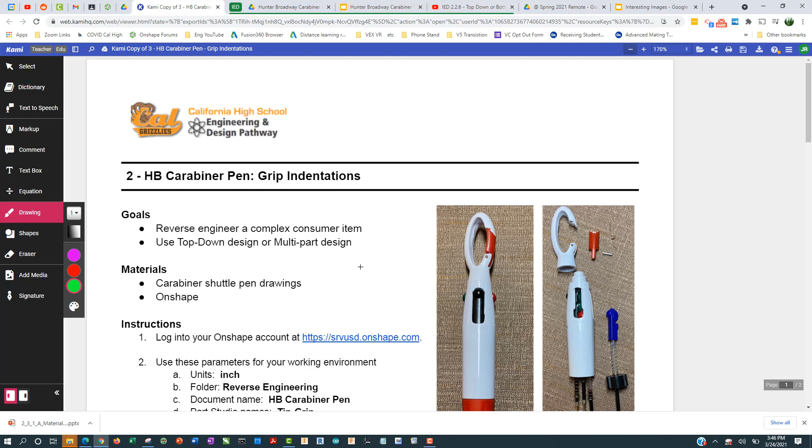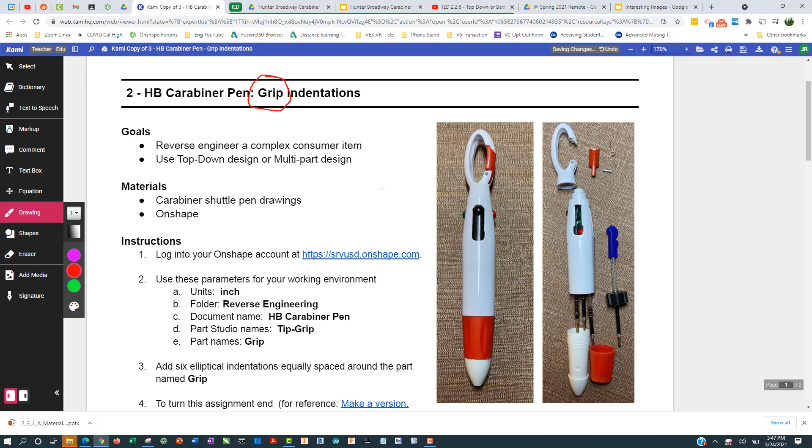In this video, we want to modify the grip that we've made previously, the orange grip, to include these indentations. If you look closely at the pen itself, you can see that right here there are these little elliptical indentations, and if you look at it more closely, you'll see there are a total of 6 of these all the way around. So we want to make these things, and you can see what they're shaped like.

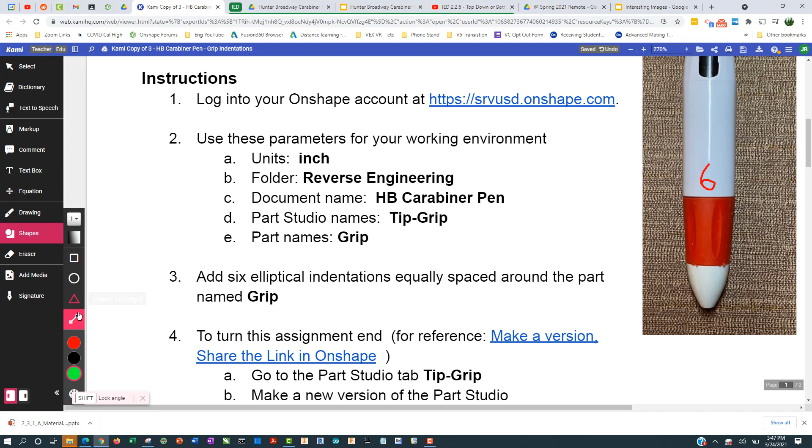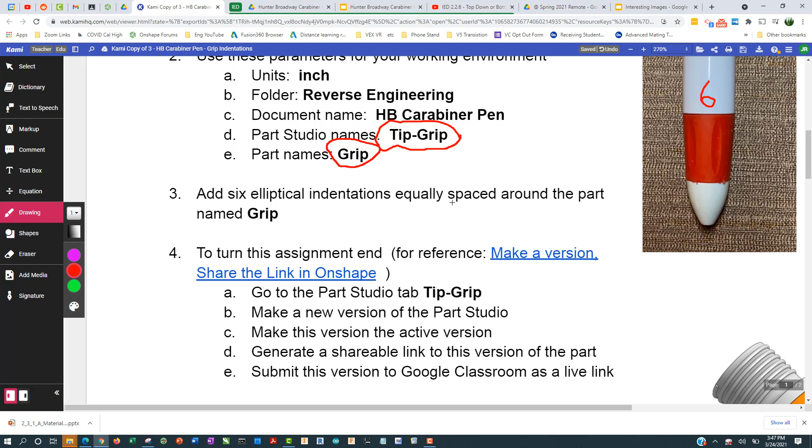So we want to continue to work on the tip grip part studio, and we're going to be working on the grip part. And it says to add 6 elliptical indentations equally spaced around the part named grip. So when you're finished, it'll look something like this down here.

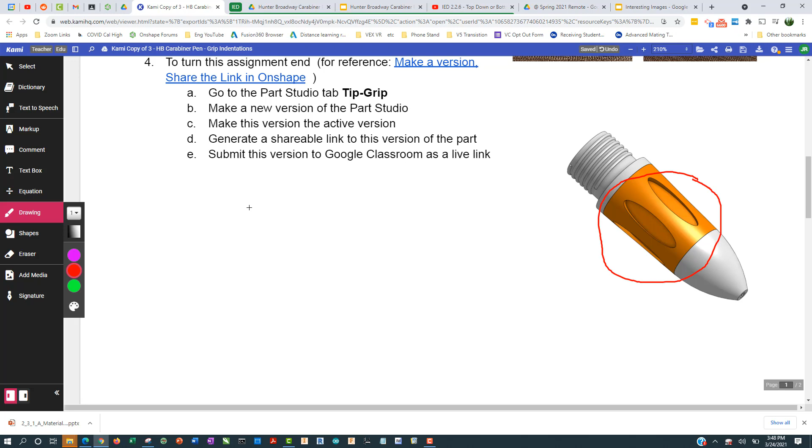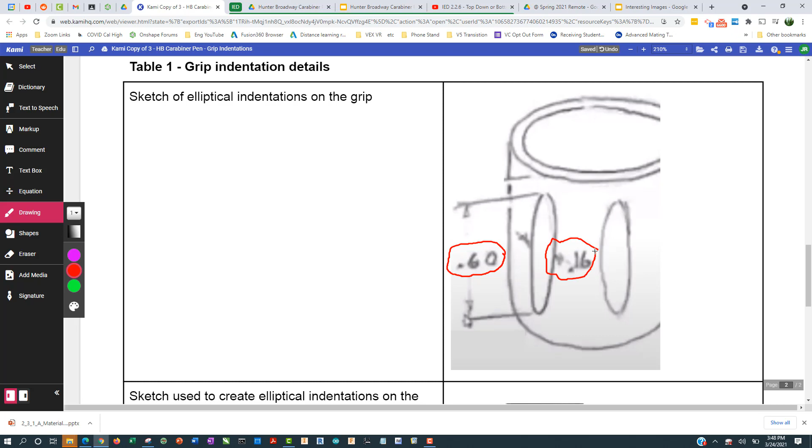Alright, so let's start first at this point, and let's see if there's any instructions here. So here is a sketch that might be drawn when we're doing the reverse engineering, and here we've got 0.6 for the major axis of the ellipse and then 0.16. And it doesn't say anything about where it's placed relative to the grip, but I guess we can use this one here. So use this sketch to create the elliptical indentations. Note that the sketch plane is 1 inch from the origin.

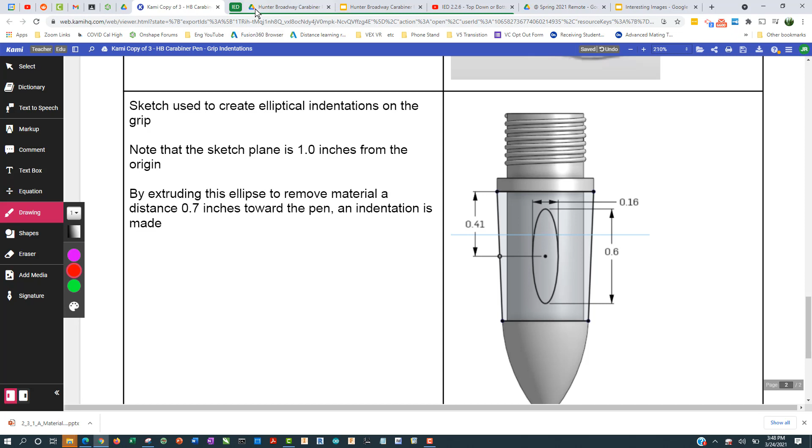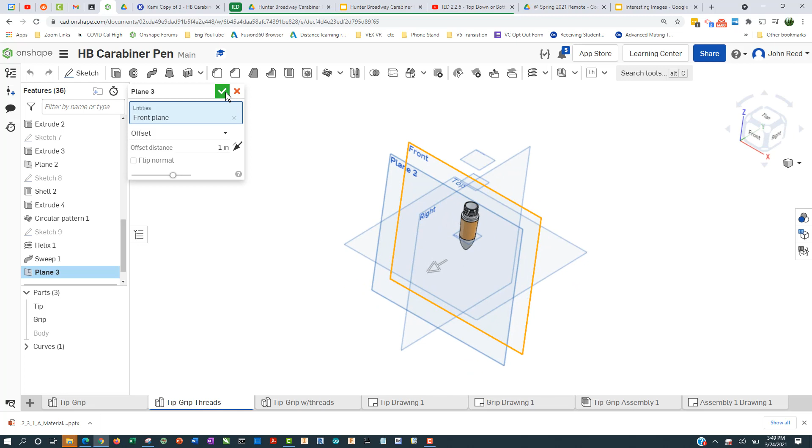So let me show you the strategy here. So we're going to come here, and again I'm going to turn on all the planes and press Shift 7 to get isometric, and I'm going to right click on the front plane and do an offset plane, and it comes out 1 inch, as you can see there. Plane 2, and I'm going to accept that, or is that plane 3? Anyway, I'm going to accept it. Alright.

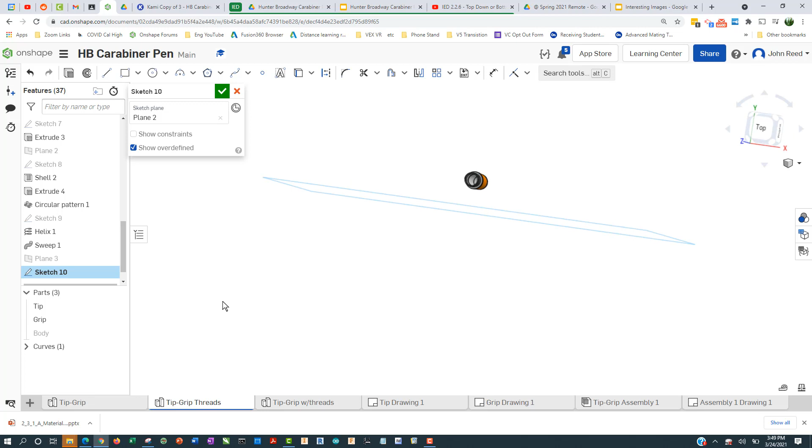I may have a plane 2 already there, so I'm going to place a sketch on that plane. Press N to get the sketch plane normal to me, press P to get rid of all the planes, and you can see now I've got a sketch plane out in space 1 inch from the origin, so 1 inch from the center of that thing. Okay, so what's going on here? Why am I doing this?

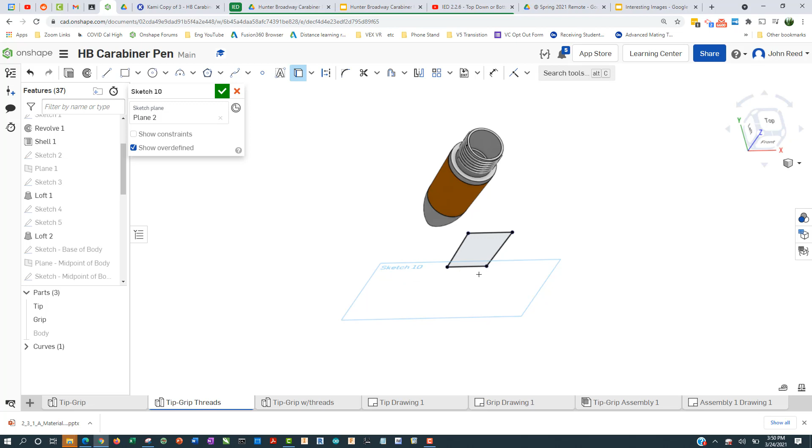Well, to make this ellipse, what I'm going to do is use these lines here. I'm going to project these lines from the part onto my sketch plane, and again, if I look out, you can see my sketch plane goes in all directions infinitely far, even though it shows a finite rectangle there. But my sketch plane is out here, and I've just projected those edges of the grip onto that sketch plane. So I'll press N again to get normal. Alright,

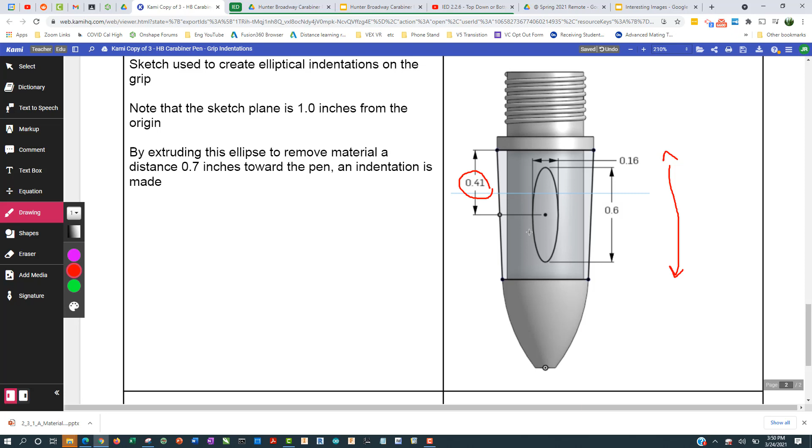so I'm going to come up here to the ellipse, and I'm going to move along here until I get halfway. Do I do that? Let's come back to the instructions. It looks like that is the center. I recognize the 0.41. I think this distance here is 0.82. So I am going to put it halfway up. Let's see if that works.

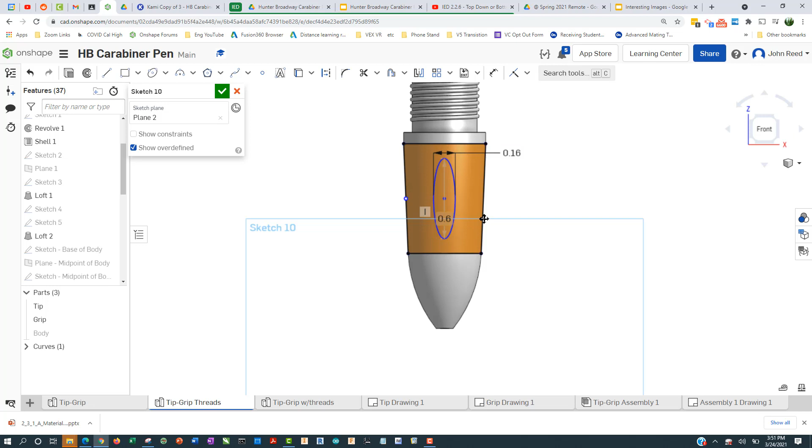So I've chosen the ellipse tool. I'm going to come up here to halfway, then I'm going to move over, click there, and then click there. Okay, and so this is 0.6. That's the length of the major axis, and then the minor axis is 0.16. Okay, so let's kind of move these dimensions out of the way so we can see better.

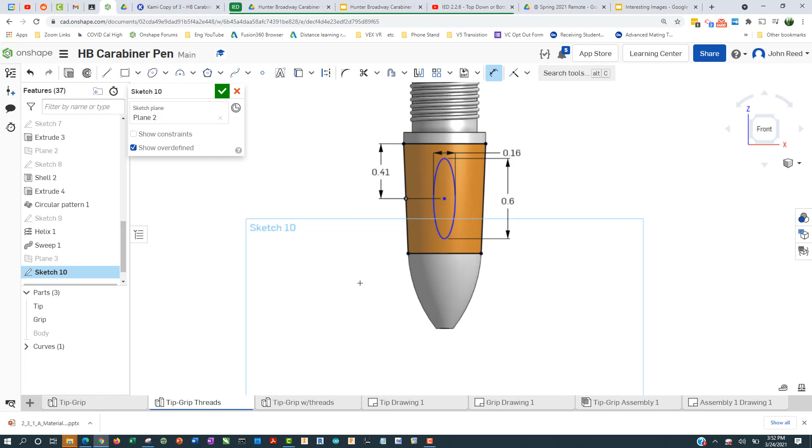Okay, and the reason that it is still blue is because we don't know where it's located, so I think we're told to make it 0.41 from the top, and I think that is halfway, so that dimension is kind of a driven dimension. It's just documenting it. It's already equal to that. Okay, still blue. I wonder why. I think I haven't placed it horizontally, but I don't need to. So I'm going to stop there. And I'm happy with that.

Well, maybe I could just to document it. So from here to here, I'm not really going to use this dimension, but it will make my sketch fully constrained and all black.

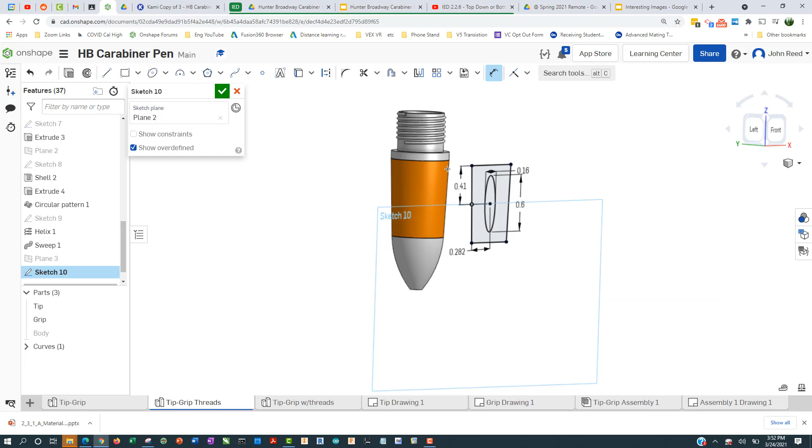Okay. So again, I've got this sketch way out in space, and what I'm going to do is extrude down toward the pen, and I'm going to remove material as I do that, and it's going to intersect the orange grip, and it's going to take away some of it. Remember that the orange grip was done with a sweep, and so if I come over here to the left view, you can see it's at an angle, so I'm going to extrude different amounts, and that's okay. So it's going to have to go deeper up here than here, but that's okay. All right, let me go back to here.

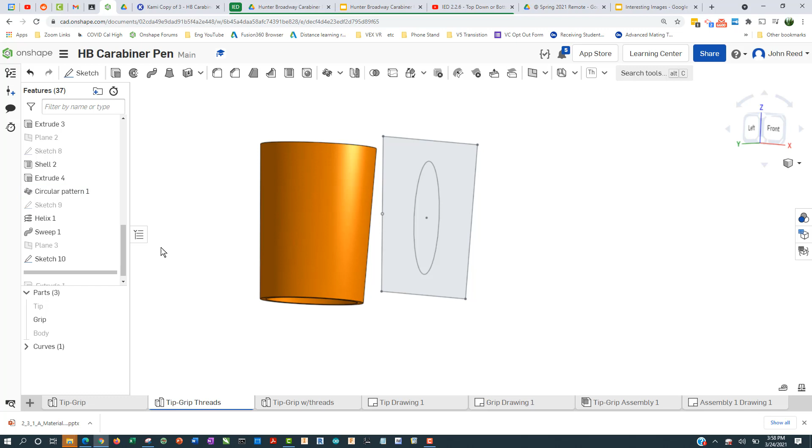Okay, here is my sketch, and I'm going to extrude toward the grip by a certain amount. It's going to be 0.75 inches. You might have to play around with this number. And I'm going to remove material, and it'll intersect and remove part of the grip. So let's extrude here. We'll click there, remove, and we'll go 0.75, enter. And I'll accept that, and you can see that it makes this indentation right there that looks pretty good.

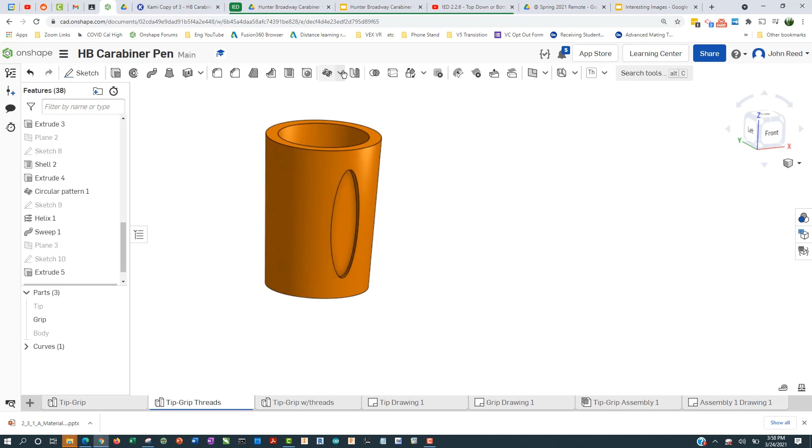Okay, now the next thing I want to do is use the, where is it? A circular pattern here. Okay, so to do that, I got to be careful here. You want to do a feature pattern, not a part. We want to have 6 of these, and so I want the pattern to be this extrusion that I just did.

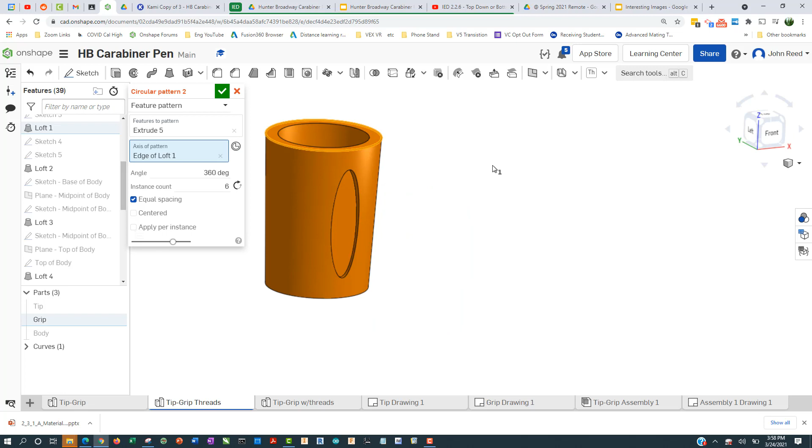Now it's looking for the axis, and I can just use the circle here and accept that, and then I've got my patterned grip. And if I turn on the tip again, you can see that it's got everything it needs.